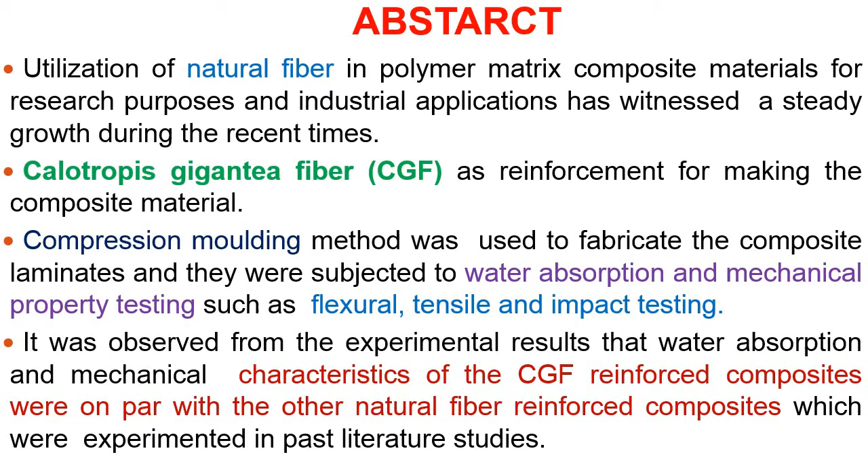Now we move on to the introduction. Composite is a combination of two or more materials to get better properties. This is natural fiber reinforced composite. When we take natural fiber from plants, it has recently attracted much attention from scientists, industrialists, engineers and researchers for its potential utilization as a substitute for synthetic fiber in fiber reinforced polymer composite materials.

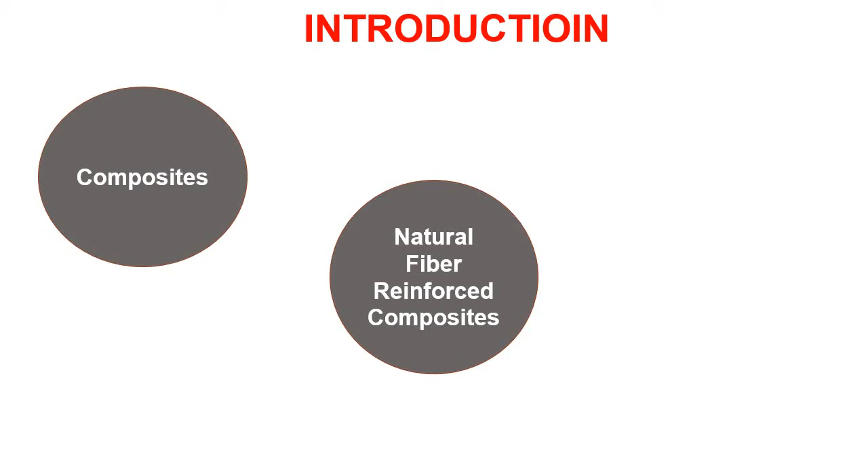This is a major reason. We also have specific benefits when going for natural fiber, which is biodegradability, low cost, easy availability, non-abrasive nature, enhanced specific strength, mechanical characteristics, and mainly environmental friendliness. This is most important, that's why we are going for natural fiber reinforced composite.

In the natural fiber reinforced composite, we go for Calotropis gigantea bast fiber. Several researchers have investigated the potentiality of using two different types of Calotropis gigantea fiber. Normally, if you take the Calotropis gigantea plant, we can get two types of fiber, one from bark stem, another from seed, which is used as reinforcement in composite material.

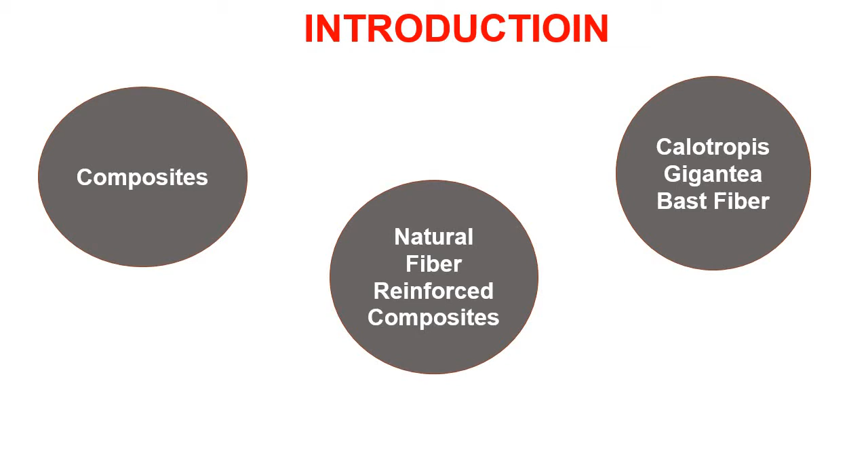If you take the Calotropis gigantea fiber extracted from the bark of the plant, it has characteristics of smaller thickness when compared with diameter. This is the introductory level part.

Moving on to the LY556 epoxy resin and HY951 hardener, why do we have to choose it? The reason behind LY556 epoxy resin is it's a solvent-free resin, and that's most important, it has a medium viscosity. When we go for composite laminates, the resin can freely move throughout the entire laminate of composite because of its medium viscosity.

We are using hardener HY951 mainly because it gives high rigidity, that's what we want. So we use epoxy resin and hardener in a 10:1 ratio.

Then we go for compression molding. Compression molding is a manufacturing method of composite laminates where the polymer matrix material is preheated before being placed in the open mold cavity.

Mainly, we go for compression molding because in a lot of literature, they use the hand layup method. But with hand layup method there's a drawback: when applying force during the composite laminate process, it distributes in a non-uniform manner, with some places receiving a higher amount of force. To overcome that, we go for compression molding.

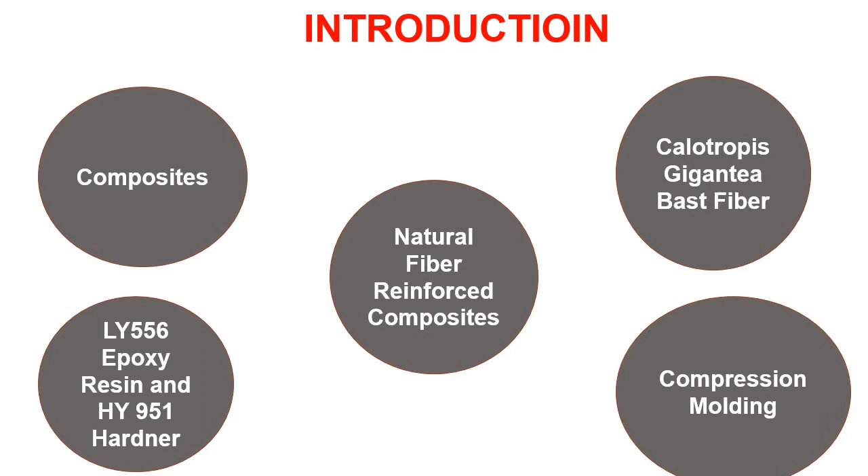During compression molding, we supply uniform force, so the stress acts in every place in a uniform manner. That's the advantage here, and we get a high quality of composite laminates from compression molding.

And then for the flexural test, we are using the ASTM D790/10 standard.

As per the standard, we take the specimen measurement: length into breadth into thickness, which is 125 mm into 12.5 mm into 3 mm, and the gauge length adopted for the specimen was 100 mm. A load cell of 10 kilonewton was used. Normally we take the rate of loading as 5 mm per minute.

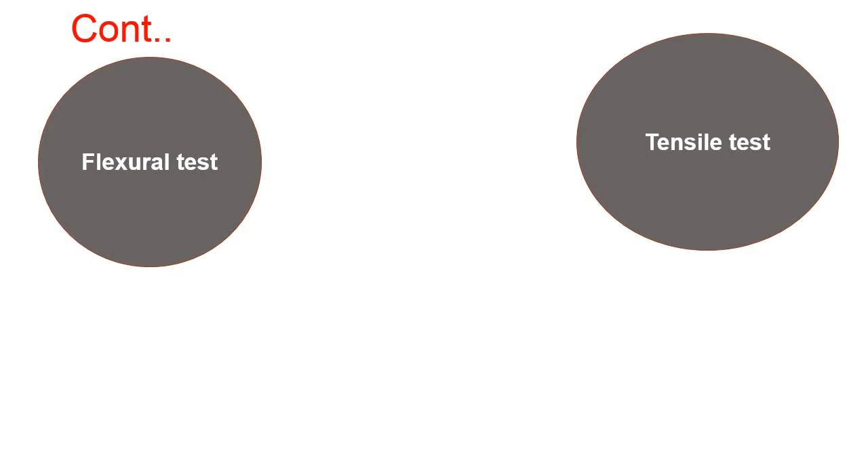Then we go for tensile test. In tensile test we are using ASTM standard D638/10. We prepare a specimen with dimension of 165 mm into 25 mm into 3 mm, and the test was conducted in a universal testing machine with a gauge length of 100 mm and 5 mm per minute as cross head speed.

Then we go for impact test. In impact test we are using ASTM standard D256/10. The dimension of the specimen is 62.5 mm into 12.5 mm into 3 mm. Normally we go for Izod impact test, where we calculate the impact strength, in which the specimen is mounted vertically against a pendulum hammer with a swinging action.

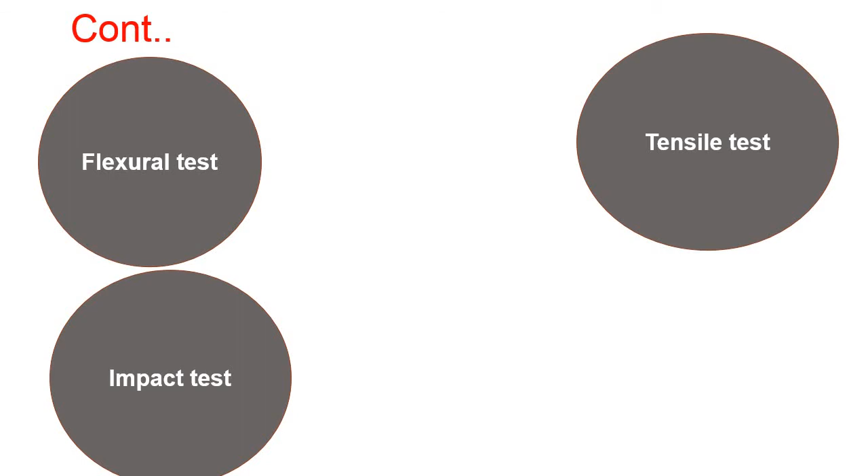Then we go for water absorption test. We are using ASTM standard D570. The specimen of the fiber and composite was immersed in water for more than 72 hours, and the change in weight of the composite material is recorded every 4 hours in a periodic manner. The percentage of weight gained by the composite sample has to be calculated.

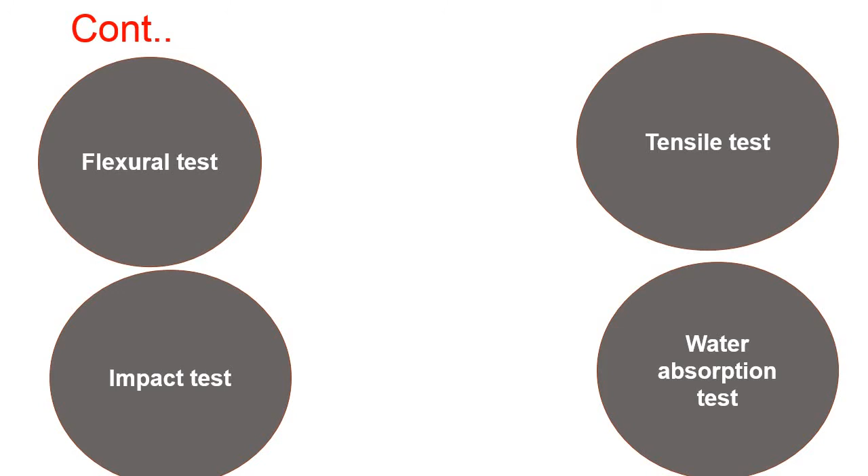How we calculate it: the percentage weight gain equation is wet weight minus initial dry weight, divided by initial dry weight, into 100. This gives us the percentage of weight gain. Later I will show it in a figure, and you will get it very clearly.

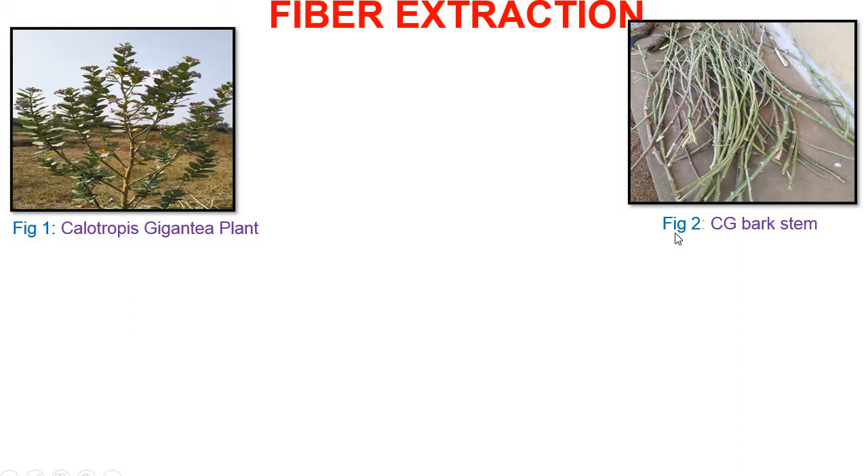Then we go for fiber extraction. This is so interesting - this is the Calotropis gigantea plant. We remove the leaves and petioles, and then we get the Calotropis gigantea bark stem, like you can see. Then we go for the water retting process.

What is the water retting process? After taking the bark stem, we dip it into water for nearly 7 to 8 days. During these days, the water molecules, having capillary action, are able to penetrate into the stem. It will ooze out and get bulgy like that.

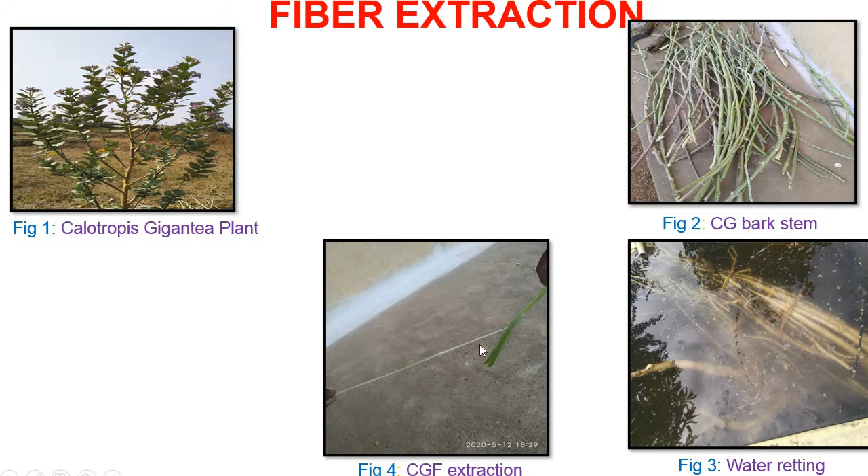After some 8 days, we take out the Calotropis gigantea bark stem and put it in sunlight for 2 days. After that, the fibers slightly come out by mechanical process. You can see in the figure how we extract the fiber in a mechanical manner.

Normally it has very light density, nearly 0.56 gram per cubic centimeter, as per literature survey. Then we get a cumulative manner of Calotropis gigantea bast fiber - this is the fiber finally we achieve.

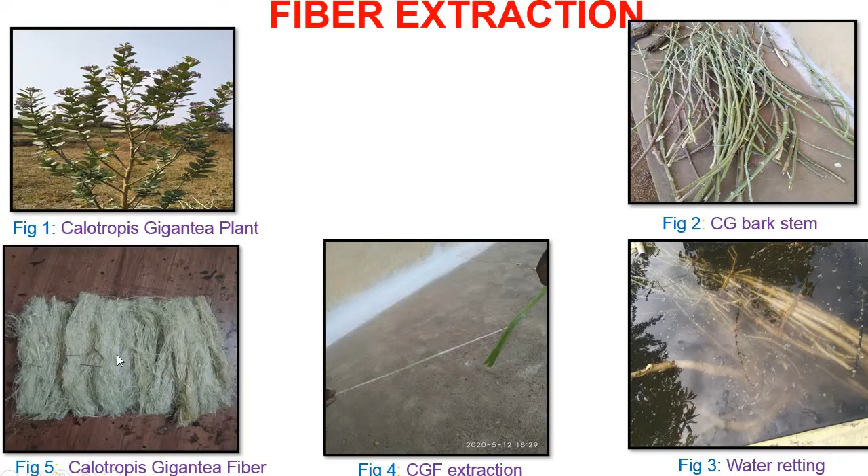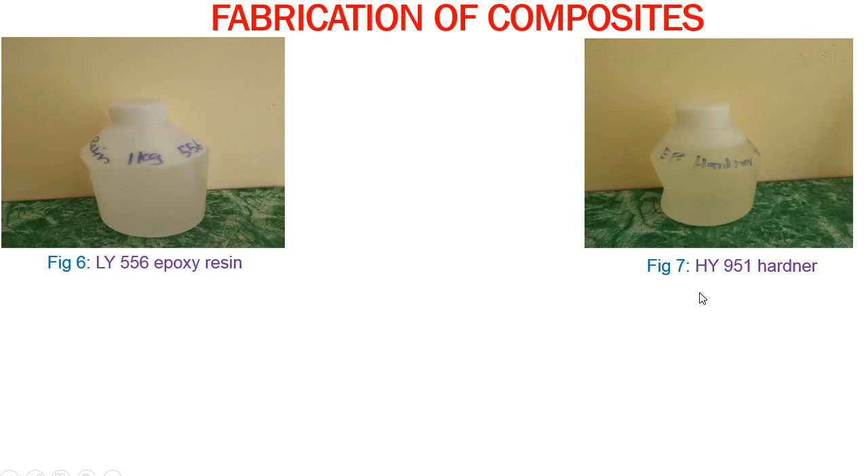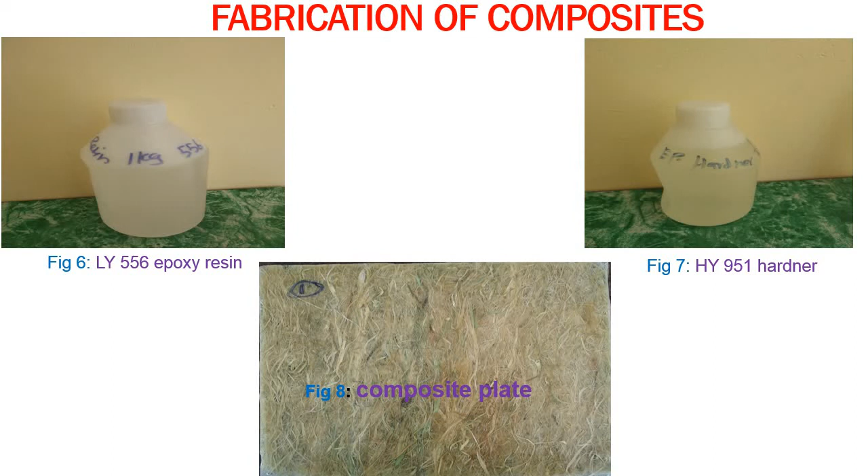Finally, by using a compression molding machine, we apply the load, and then pour the resin and hardener mixture. Finally we get the composite plate - from there you can see figure 8, this is the composite plate.

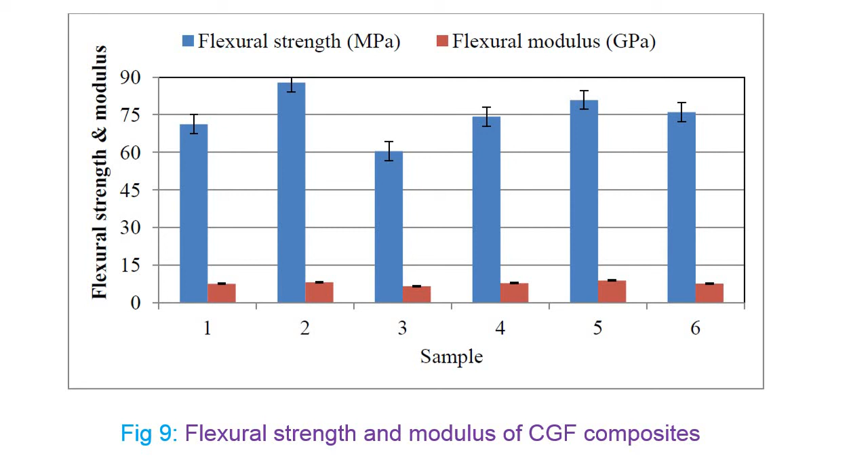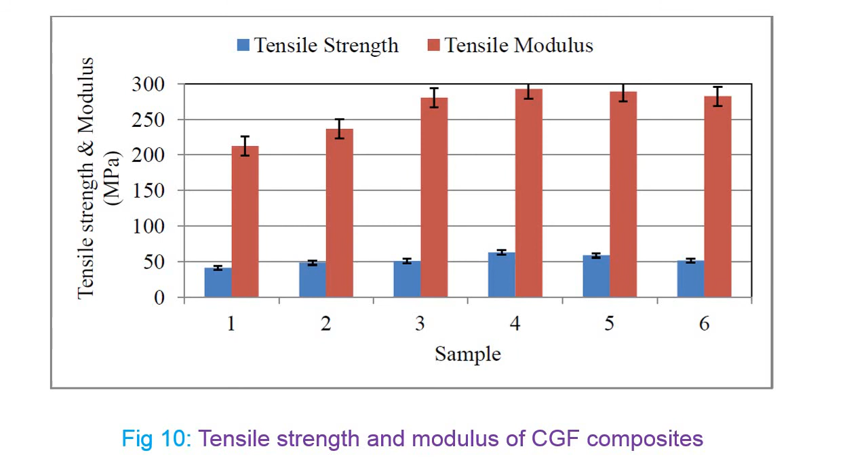When we are going to increase the fiber content, we have to achieve a greater tensile strength and tensile modulus. And also length of fiber will play a vital role, this is also very important. The fiber content plays a very vital role.

And coming back to impact strength, the highest impact energy absorbed by Calotropis gigantea fiber composite is 10.4 kilojoule per meter square. And the lowest impact energy absorbed by Calotropis gigantea fiber composite is 8.8 kilojoule per meter square. We have to calculate it.

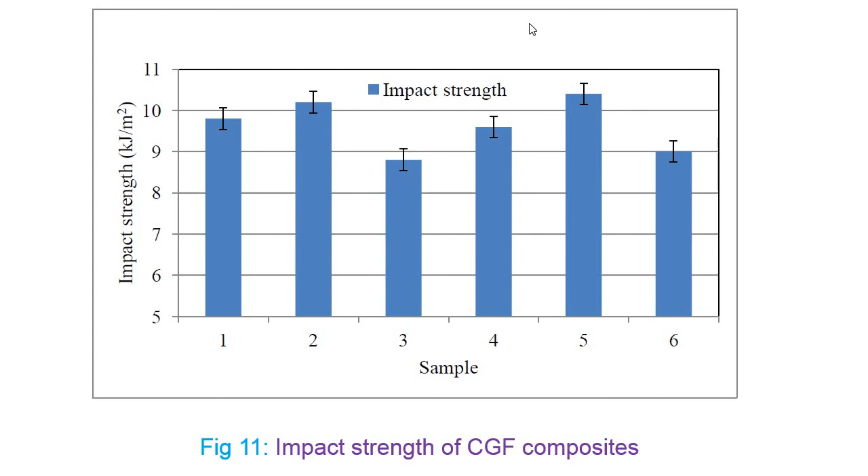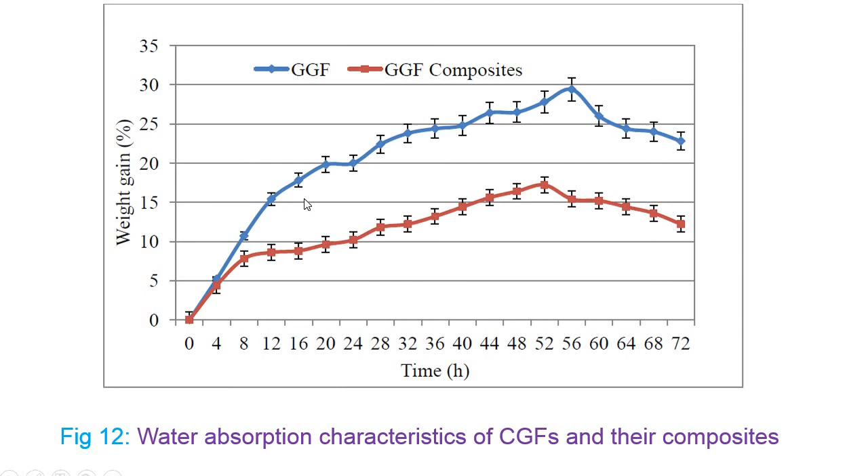The Calotropis gigantea fiber absorbs higher amount of water molecules. The reason behind is, generally natural fiber having a hydrophilic nature. Due to the hydrophilic nature, the Calotropis gigantea fiber has the tendency to absorb many water molecules when compared with the composites. We take 72 hours totally, recording readings periodically on a 4-hour basis. We used the water absorption tester machine.

And then finally coming to the conclusion: tensile strength and modulus were found to be better for Calotropis gigantea fiber composite due to enhanced load carrying capacity of the fiber. Second point, the Calotropis gigantea fiber reinforced composite material exhibited better flexural strength and modulus values of 87.88 megapascal and 8.86 gigapascal respectively. Third point, the maximum impact strength recorded is nearly 10.4 kilojoule per meter square.

And from the experiment it is concluded that the rate of water absorption of Calotropis gigantea fiber is higher than the composites. This may be due to the hydrophilic nature, as I already explained.

Overall, final conclusion: it could be stated that Calotropis gigantea fiber reinforced polymer composites are very efficient materials and substitutes that are much suited for various applications in domestic, automotive, interior or exterior components. Thank you one and all.